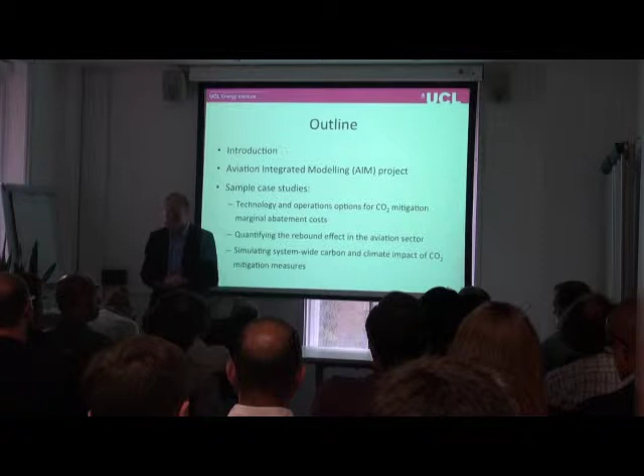The first one is going to look at the marginal abatement costs associated with different technology and operations options. And then we're going to have a look at how these cost changes may impact the system, how the system may respond to them by trying to quantify the rebound effect in the aviation sector. And then I'd like to bring this all together in a system study where we try and simulate the system-wide carbon and climate impacts of a number of different CO2 mitigation measures.

As I think we all know, aviation contributes significantly to the economy. The Air Transport Action Group estimated this year about 3.4% of global GDP. But of course, aviation also has negative environmental impacts and particularly climate impacts. An estimate is about 2 or 3% of global anthropogenic CO2 emissions are from aviation. But as you're probably all aware as well, CO2 is not the only problem when it comes to aviation. There's a number of other impacts.

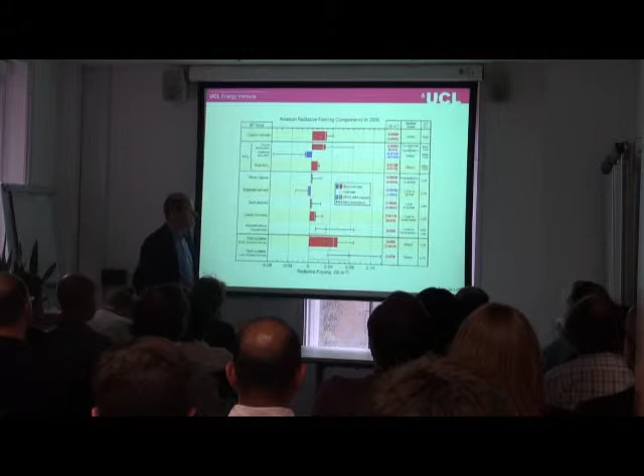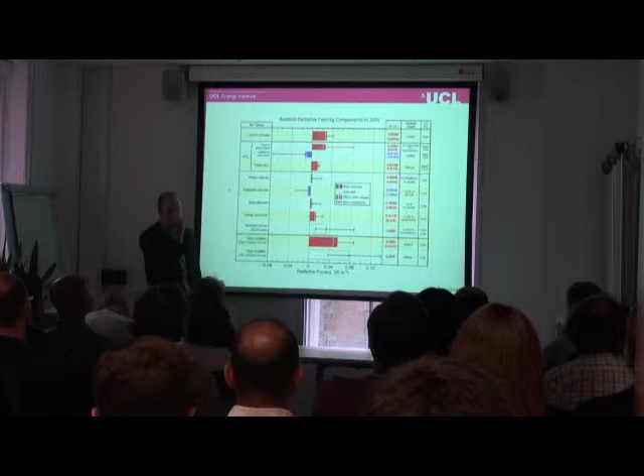I'm sure many of you will have seen this chart before from David Lee. At the top is the radiative forcing due to CO2. And as you can see, there's a number of different emissions that have different impacts. The net NOx impact is significant, and then the contrail impact is significant. Contrail-induced cirrus is also significant, but the uncertainties on that are still fairly large. But the result is that the radiative forcing due to aviation, including the non-CO2 effects, is significantly higher than just due to CO2. So there are non-CO2 effects, and these are important.

David Lee reports that about 3.5% to nearly 5% of global anthropogenic radiative forcing is due to aviation. That includes the non-CO2 effect. But this is 2 to 3%, 5% - these are not enormous numbers.

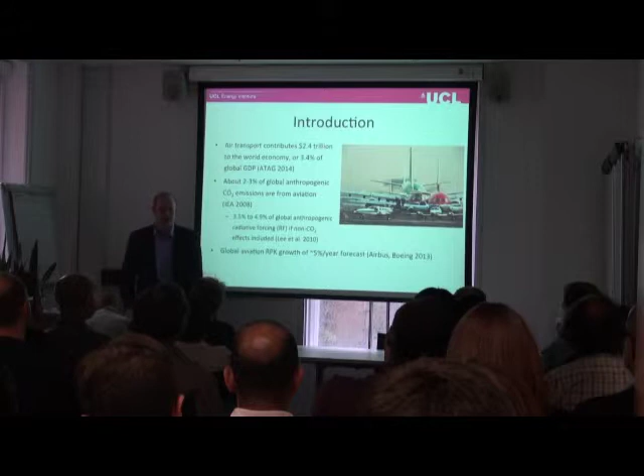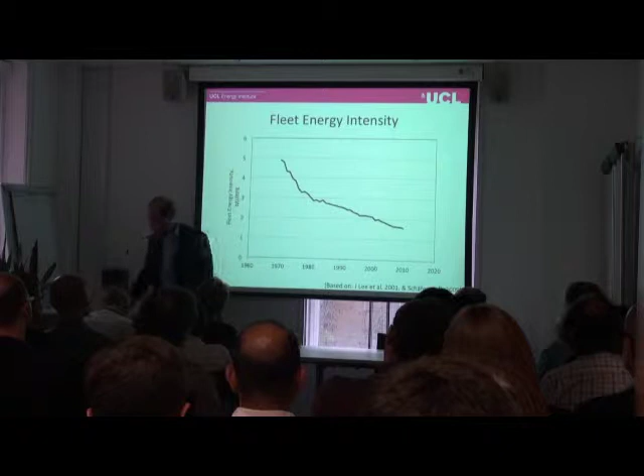This is why aviation is a target for emissions reduction policies, and the inclusion of aviation in the EU ETS is our obvious example.

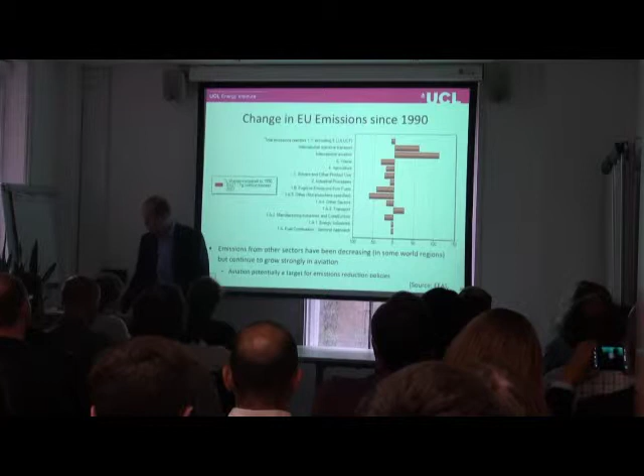So what kind of mitigation measures are there for aviation? We've already mentioned economic measures - inclusion of aviation in the EU ETS, for example, and the development of a global ETS or market-based measure to deal with aviation, currently being handled by ICAO. The idea is to increase costs to the airlines, and ultimately some of this will be passed on to passengers, reducing passenger demand slightly, or reducing the growth rate in passenger demand. But more importantly, it's stimulating other measures - that's really what we're after.

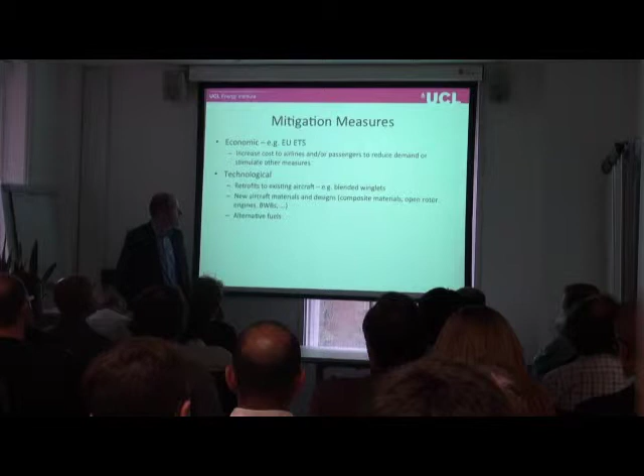A number of these measures are technological, varying from retrofits, fitting aircraft with blended winglets, new aircraft designs, new aircraft materials such as composites on the 787, more radical design changes such as open rotor engines - I'll show pictures of these later - and even more forward-looking design changes for the aircraft such as blended wing bodies. Alternative fuels is also a very important technological development.

There are also operational developments, particularly on the air traffic control side - continuous descent approaches and other procedures that reduce fuel burn operationally and improve the efficiency of the air traffic system. There are also changes airlines can make, such as altering their cruise speeds so they coincide more with fuel optimal speeds as opposed to cost optimal, and lightweighting and such like.

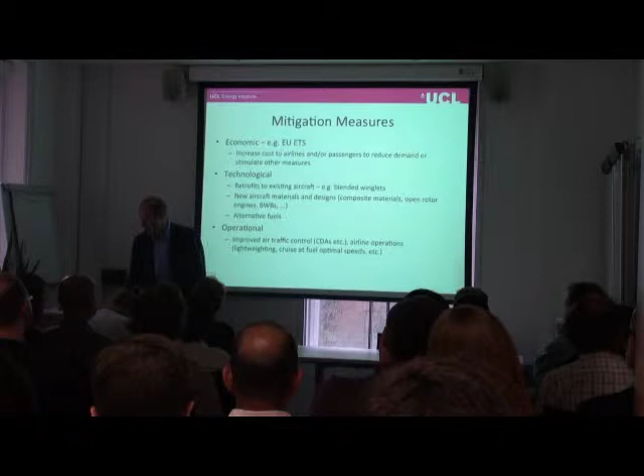There are a number of different measures, and the best results are likely to come from a combination of these - there's no real silver bullet, so to speak. The best solution is going to come from a number of these measures. This is where complications arise, because the measures can interact, and they're not necessarily additive. An obvious example is if you apply an engine upgrade kit and then re-engine the aircraft, you're not getting the additive benefit of both.

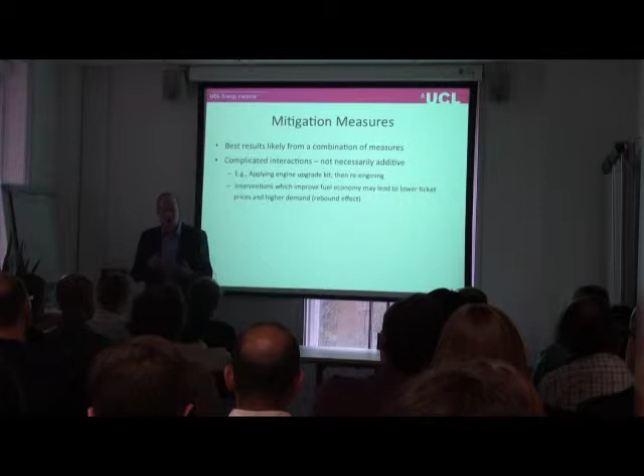There are also other effects, such as introduction of new technology causing changes in operating cost, which may play through the system to have other effects. For example, reductions in operating cost could lead to reductions in fares if in a competitive environment, which could ultimately lead to an increase in demand. So you're getting this rebound effect.

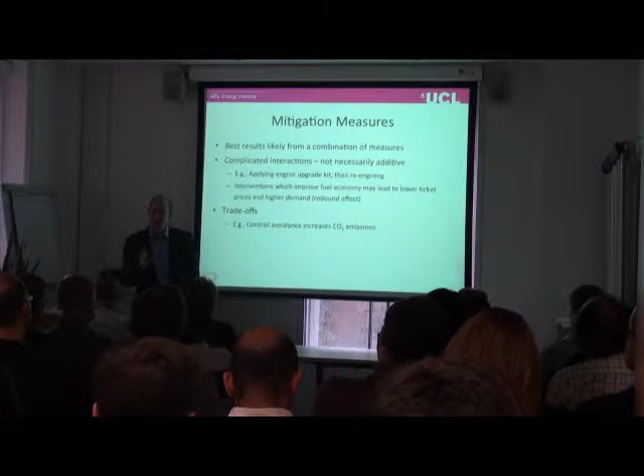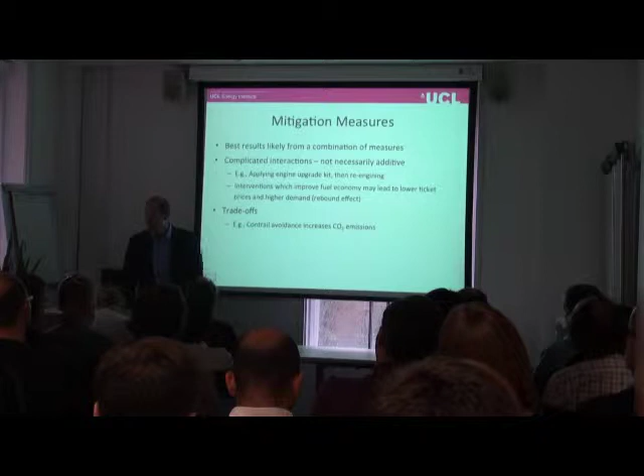There are also a number of trade-offs. An obvious example is contrail avoidance - if you introduce air traffic measures to route aircraft around regions of airspace with contrail formation, you're burning extra fuel in doing that, increasing CO2 emissions. So there's a trade-off in climate impact there. There are other trade-offs too, for example in combustor design in jet engines with NOx production and CO2.

Also importantly, we don't know what the future holds. There are a number of uncertainties regarding future populations, income growth, particularly oil price and carbon prices. These all have a significant impact on how different technologies would enter the fleet, at what rates, which technologies, and how they would compete with each other.

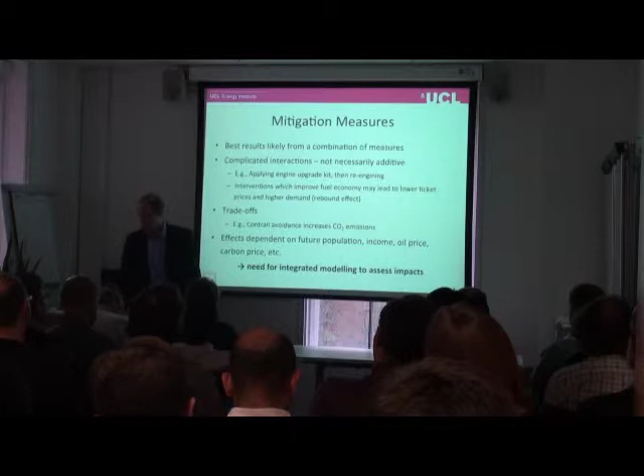This really suggests there is a need for integrated assessment modeling, and this was really why we started the Aviation Integrated Modelling project. This was started at Cambridge back in 2006, and the objective was to develop a policy assessment tool for studying the interaction between aviation, environment, and economics.

And we've used this model to do a number of global studies, a number of regional studies, looking at various different timescales. I'm not going to describe each module in detail, but I'd like to talk you through how the model works.

This outputs to an airline and airport activity module, which models how the airline chooses to serve that demand - scheduling, what type of aircraft they're going to operate, what kind of flight frequencies. It also estimates flight delays in the airport vicinity.

This takes significantly from the aircraft movement and aircraft technology and cost module, because in the aircraft technology and cost model we introduce new technology, and we also model fleet turnover - how existing technology is being retired, and how new technology is entering the fleet, at what rate. This is of course a function of fuel price and a number of other things.

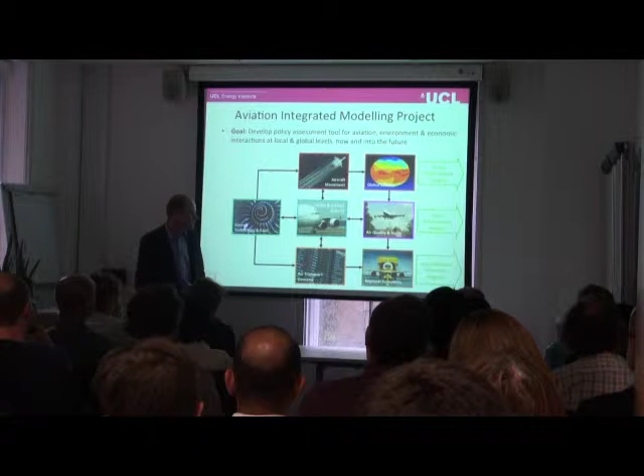For regional economics, we then estimate environmental costs, particularly associated with air quality and noise, and economic benefits coming particularly from the demand flows that we're estimating, and we can compare these - economic benefits.

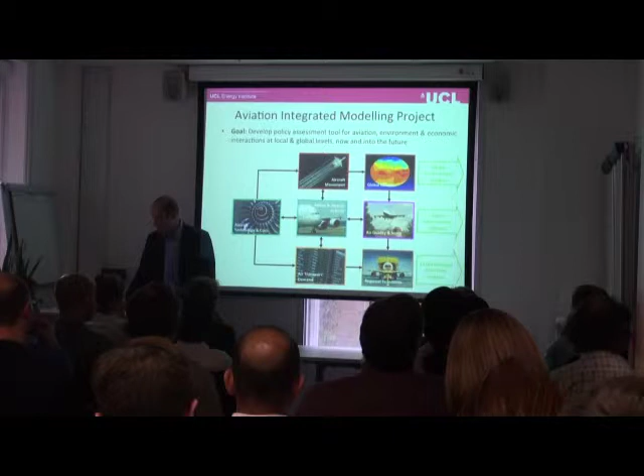Now, we can then apply policy levers to each of the modules on the left - whether it's evolution of the air traffic system, or changes in airport capacity, such as adding a runway at a key airport or not. Regulation, so forcing certain technology to come into the fleet. Economic instruments, an ETS or passenger duty. And then we can model how these effects play through the rest of the system before outputting to the impact modules.

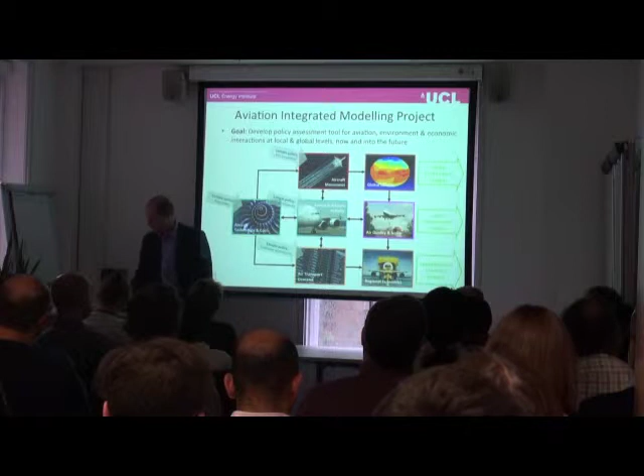The scope of the model is 95% of the global scheduled revenue passenger kilometers, as shown there. As I said, I'm not going to go into detail on each one of the different modules - there's quite a lot of detail in how we do the modeling in each module, and you're welcome to talk to me afterwards about anything you're interested in.

I'd particularly like to talk about the modeling of airline decision making, which falls particularly in the airline and airport activity module, and a little bit in the aircraft technology and cost module. The first task is to predict flight network routing and scheduling, and we have two levels of modeling for this. At the global level, we typically use a fairly simple model that assumes the flight network routing structure stays the same.

Now this is a reasonable assumption for developed regions, but for some of the developing economies, India, China, South America, this is less good an assumption. We assume also fixed load factors, and then we use a multinomial logit model to predict how the use of different aircraft size categories changes with time as demand grows.

For more regional studies, we have a high fidelity model that actually simulates the airline decision-making process. What we do here is maximize profit for each airline and optimize the choice of aircraft and the network, so we do a network optimization.

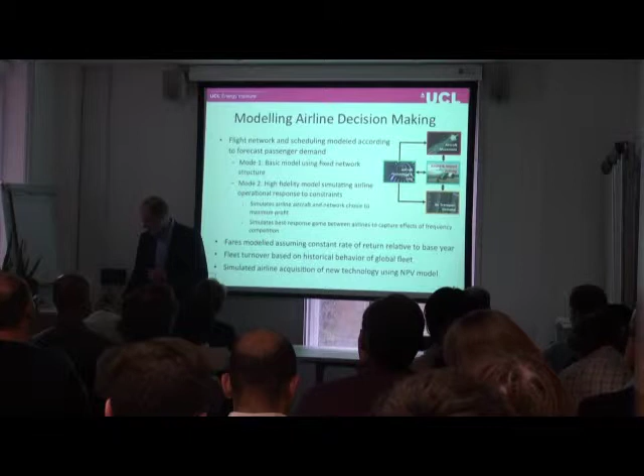So what I'd like to do for the rest of the talk is address the question I posed at the start: is technology enough to mitigate the climate impacts of aviation? I'm going to do that with three different case studies.

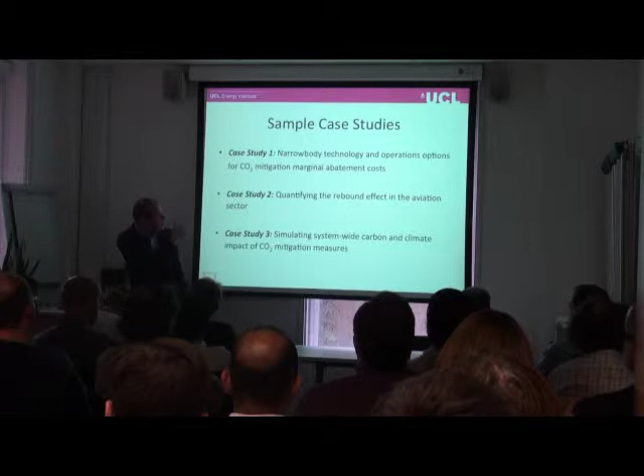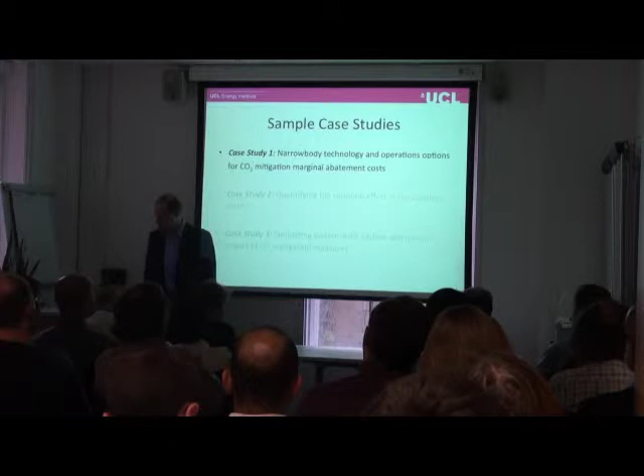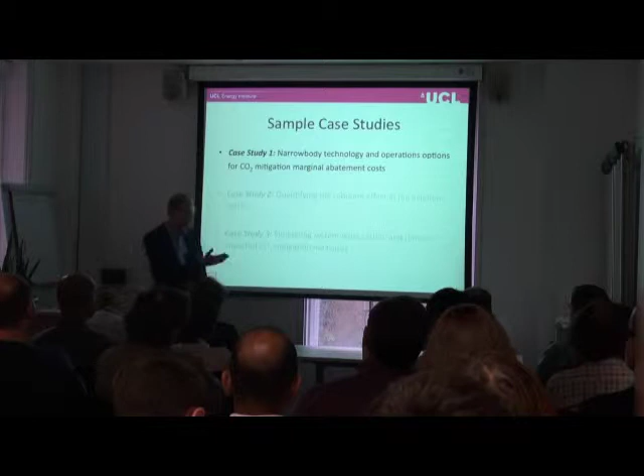I'm going to start off by looking at trying to quantify the marginal abatement costs for narrow-body aircraft, particularly looking at technology and operational options to do this. This study specifically looks at the US domestic narrow-body market, and Andreas Schaefer and I have worked for a while on this, but he took the lead, so I acknowledge that.

Now, what do we mean by marginal abatement cost? It's typically defined as the change in your direct operating cost divided by the change in the CO2 emissions mitigated. So units are dollars per ton of CO2.

But there are some problems with this metric because it's a snapshot in time. At a certain level of fleet entry for a certain technology and certain fleet characteristics, it's really just a snapshot in time. So it becomes difficult to compare different technologies that may be entering the fleet at different times, and therefore entering with a different fleet structure. Different measures enter at different times, and it's very dependent on the structure of the fleet - how many aircraft are close to retirement, what size category are they, does this correspond to the technology we're introducing. It also doesn't account for the buildup of CO2.

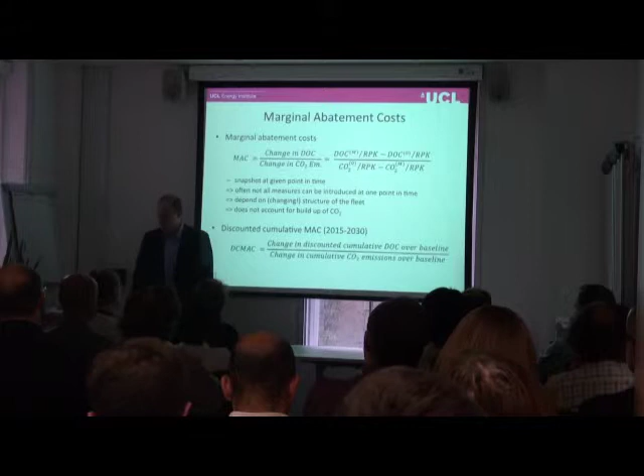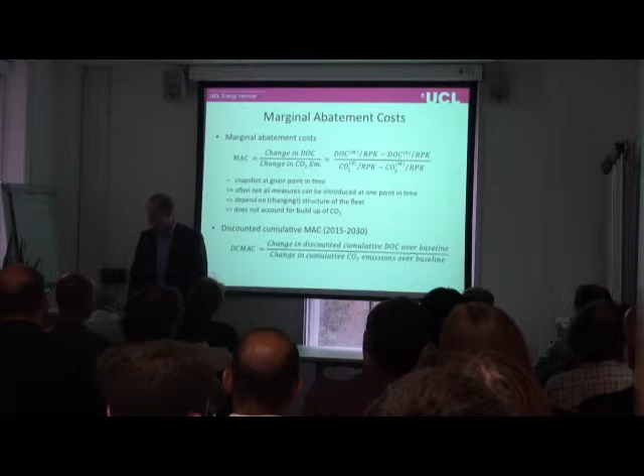So what we do in this study is use a discounted cumulative marginal abatement cost. Over the period 2015 to 2030, we calculate the change in discounted cumulative cost relative to a baseline which doesn't include that technology, and then divide that by the change in cumulative CO2 emissions, again relative to a baseline. This allows us to compare technologies to each other for that period, taking into account changes in fleet structure and that different technologies may only come into the fleet in limited ways, as well as how quickly the technology will come into the fleet.

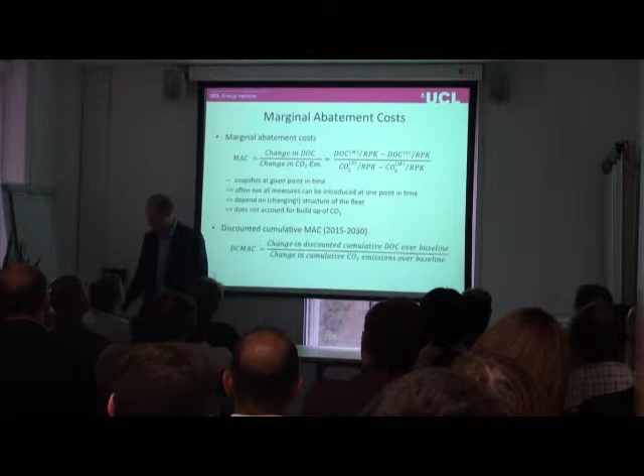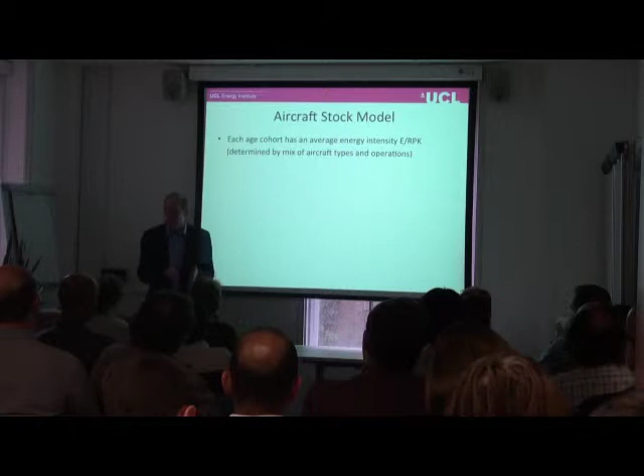Speaking of aircraft stock modeling - in the fleet structure, there are different cohorts of aircraft with different fleet ages, and the energy intensity for each age cohort is going to be different. It's a function of what aircraft type are of that age and what type of operations they're being used on. As you modify each age cohort with retrofits, for example, or retirement, this impacts the total fleet energy intensity.

So it's important to capture the fleet structure and how these different cohorts can be targeted. For example, if you've got a retrofit, you're probably not going to want to target aircraft that are just about to be retired. And if you don't account for the fleet age, you're not going to be able to account for that effect.

Now, importantly, these effects propagate over time, and this allows us to align the retrofits with the maintenance schedule. Certain retrofits are significant and require C checks to make the change. They can't just be done on the line, so this allows us to take that into account as well.

There's a number of uncertainties here, though. Firstly, simply the fuel savings potential of the technology. There's a lot of technologies that we're still quite uncertain what potential they will have. Even more so, what's it going to cost? Operational cost as well as capital cost. This is highly uncertain.

Also, associated with the cost, there's a number of costs that can often be ignored. For example, if you consider increasing your load factor, one cost to the airline is that passenger reaccommodation costs go up. Because if that flight gets cancelled, flights behind it have higher load factors, so there's fewer seats on which to accommodate those cancelled passengers. So you really need to be careful about capturing as many costs as possible, and this is particularly challenging.

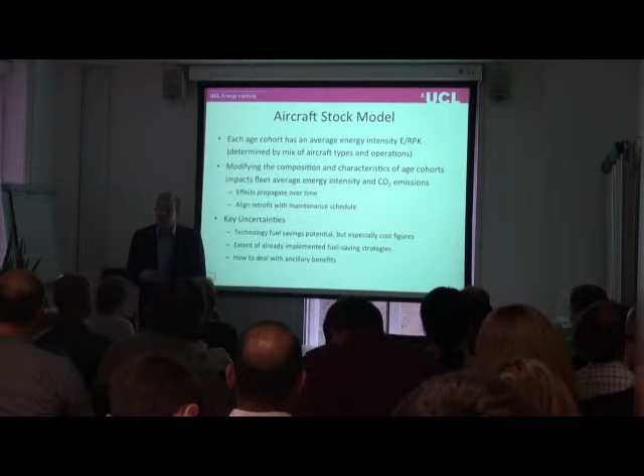It's also not always clear the extent to which some of these fuel savings technologies have already been adopted. So for some of the near-term ones, how much are they used already? And then also, how do you deal with ancillary benefits? A number of these technologies have benefits besides just reducing fuel burn, so how do you account for these?

Okay, so let me just go through a number of the technologies. On the aircraft technology side, you've got a number of retrofits, things like carbon brakes, electric taxiing, blended winglets, new lighter seats, which can give significant weight reductions, to slightly larger changes such as new engines, Pratt & Whitney's geared turbofan, or even more revolutionary open rotor engines.

On the aircraft side, you've got new aircraft designs coming in, so more evolutionary designs such as the A320neo and the 737 MAX, and more revolutionary designs such as an aircraft that's optimized for use with open rotors, optimized to fly slightly slower with higher aspect ratio wings, etc.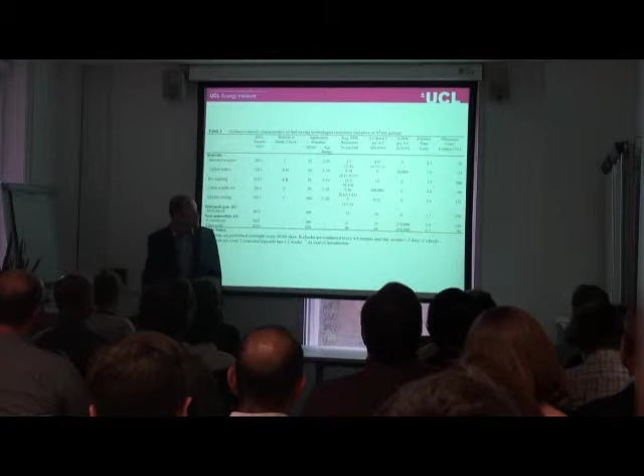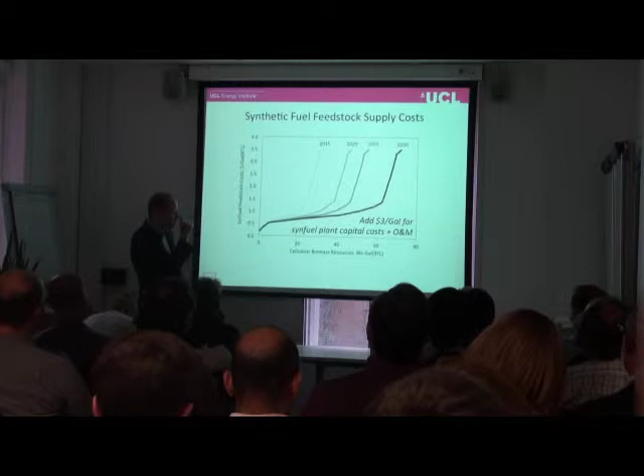We also model synthetic biofuels or synthetic fuels. We're particularly interested in cellulosic biomass. One of the key assumptions here is what is your feedstock cost? So we use a chart like this, where we basically assume that initially the feedstock cost is relatively low because you can use easily available feedstocks such as industrial waste, waste from the logging industry and such like. But very quickly those costs are going to go up because you use up those easily available feedstocks. Over time, though, the expectation is that these costs will come down.

Now, I want to stress that this is not the fuel cost. You usually add $3 per gallon for the processing cost on top of that. Interestingly, if you look at the current US domestic narrow-body jet fuel demand, it's actually still pretty low, so you can actually supply the US domestic fleet with synthetic biomass. But obviously that will cease to be the case very quickly because of growth.

Operational options: again we model a number of different procedures, so single engine taxiing, optimized departure procedures, optimized approach procedures such as continuous descent approaches or dynamic descent approaches. Also improvements in the en route portion of the flight, improving your lateral inefficiencies with the introduction of ADS-B technology, for example, as well as improving your vertical profile and speed profile, which can all reduce your fuel burn for operations.

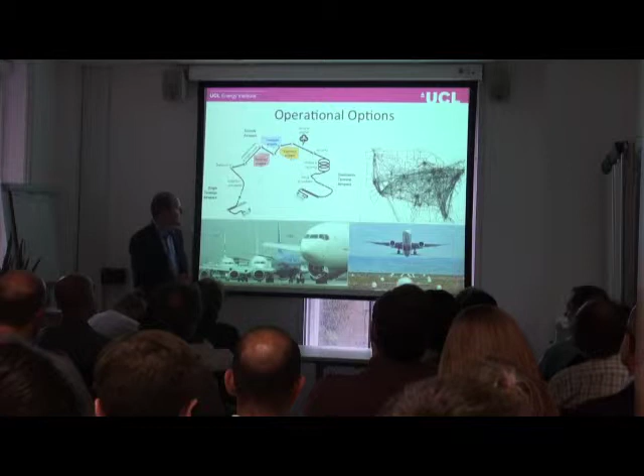And again, we make a number of assumptions about the costs of these technologies and the potential, and I'm not going to show you the chart, but if you're interested, I can send it.

Finally, we look at a number of different airline business strategies that could mitigate CO2 impact. One is reduced fuel tankering. A lot of airlines tanker fuel because of cost differentials.

Other strategies include parking the aircraft early, so early retirement, and better matching of aircraft type to mission. This is where you've got a flight with a relatively low load factor, and you could operate that more efficiently with a smaller type, such as a regional jet. Also increasing load factors generally, engine washing, and surface polishing as well. Obviously they don't actually use Pledge to polish aircraft.

For a number of these measures, the costs are quite difficult to quantify. For example, with better matching of aircraft type to mission, a key cost is that by doing that you're increasing your load factor, so your passenger reaccommodation costs have gone up significantly. Before, you had flights that were half full, so plenty of space to reaccommodate passengers. Now you've got flights that are almost full, with no space to reaccommodate passengers.

But there are also costs associated with fleet commonality. A number of airlines operate one aircraft type because the maintenance costs and training costs for their crews are reduced, and it gives them a lot more flexibility. As soon as you say, well, we now want you to fly regional jets as well, those costs go up, and they can be quite difficult to quantify.

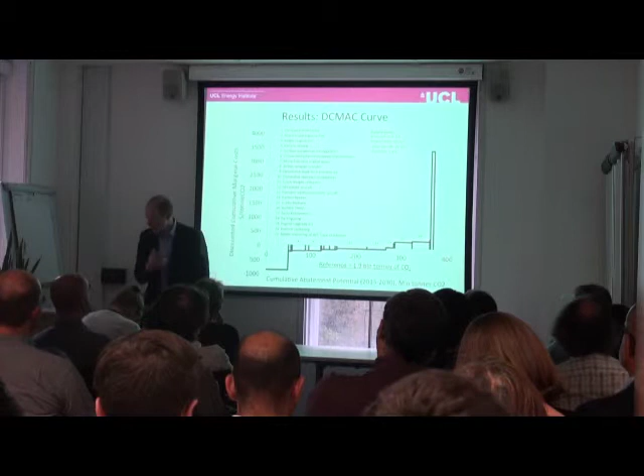So what's the result? This is a marginal abatement cost curve. On the x-axis is the cumulative abatement potential, and on the y-axis is the discounted cumulative marginal cost. Everything underneath the graph are measures you would expect airlines or manufacturers to be pursuing, because they're cost effective at the existing oil or fuel price. Measures above the graph would need an increase in the fuel price to be cost effective, either simply the fuel price rising or something like emissions trading causing the effective fuel price to rise.

Now, these marginal abatement cost curves have been done before, and there are a couple at least for aviation. Typically they only plot marginal abatement costs, not the cumulative abatement potential, so cumulative cost, which is one change here. But also, this work is well validated by the fact that all the technologies underneath are indeed technologies we know airlines or manufacturers are starting to pursue. So that's a good validation, and we've tried particularly hard to be rigorous about the costs. I think this is a significant improvement on some of the costs generated in the past, but as I said, it is a challenging cost.

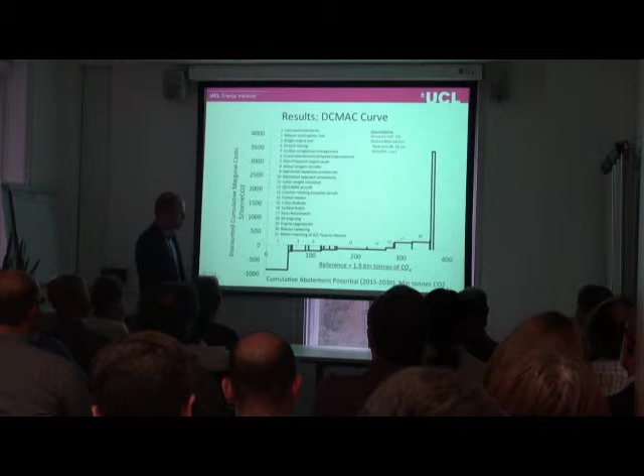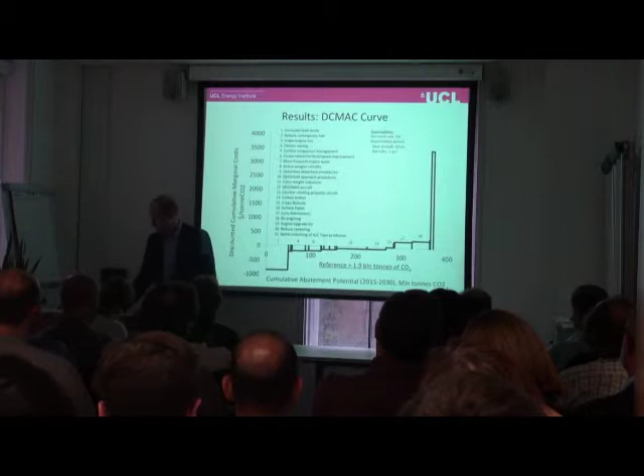We're getting about 400 million tons of CO2 mitigated, not quite, with all the measures. This compares to the reference over this period of 2 billion tons of CO2 that we've estimated, so that's about 20%, a sizable contribution. If you plot that on the curve I showed before with fleet energy intensity, the top line shows what you'd get if you simply did fleet turnover with existing technology, and the lower one shows that with a combination of all these measures, you do get a sizable reduction. So you're able to continue pulling that chart down, which is very positive.

However, there's a key uncertainty, and that is the growth rate. What kind of growth rate are we expecting in the narrow body fleet? Any growth rate higher than 2.5% to 3% per year means you're no longer getting carbon neutral growth, so that 2030 emissions would equal 2010 emissions at about 2.8% growth, taking into account all the measures described. Any growth rate higher than that, you're not getting carbon neutral growth; anything below, you are getting carbon neutral growth and better. If you only take the measures that are cost effective at the current fuel price, the cutoff is about 1.5%, so any growth rate above that, and you're not getting carbon neutral growth. That's one of the key uncertainties.

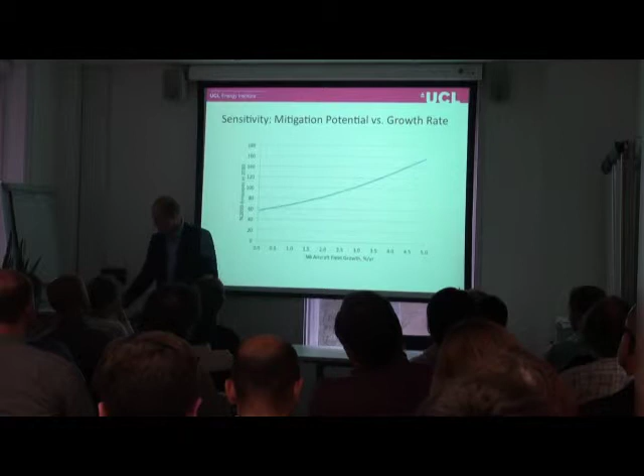To summarize the conclusion of this specific case study, we identified a number of mitigation options, and a lot of them appear to be cost effective at current fuel prices and are indeed being pursued by industry, which validates the results quite well. Obviously, if you see a technology that is highly cost effective on your marginal abatement cost curve, but airlines aren't pursuing it, then you realize you're missing some kind of costs.

As I said, the mitigation potential is strongly dependent on the fleet growth. This has a big impact. There's also a number of other uncertainties, particularly with what the costs are, the capital costs and such like. So there are a lot of uncertainties, and some of the results can be quite sensitive to those, but not all.

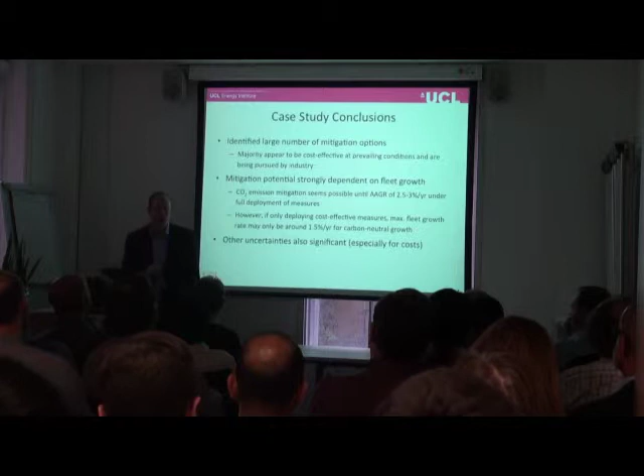Okay, so that suggests that there is mitigation potential. The question is then, how is the system likely to respond to that? And to start answering that question, I'd like to do a second case study, which is to quantify the rebound effect.

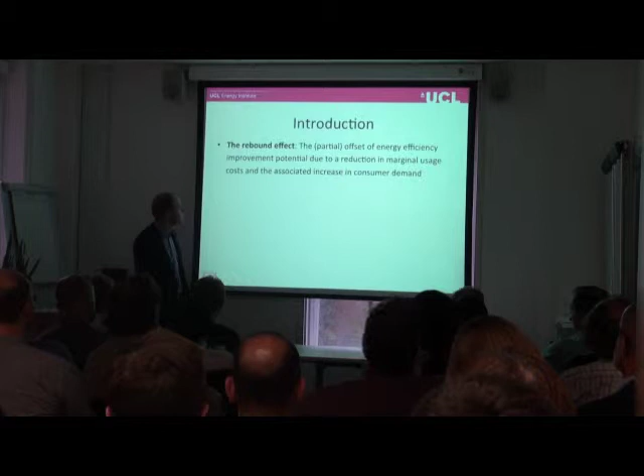Okay, so first of all, what do I mean by the rebound effect, just to clarify that? Define it as the partial offset of energy efficiency improvement potential due to a reduction in the marginal usage costs, and that's typically associated with consumer demand. So you've got a new technology that's reduced your fuel burn, you're reducing your operating costs in a competitive environment that's reducing your fares, so your demand is going up.

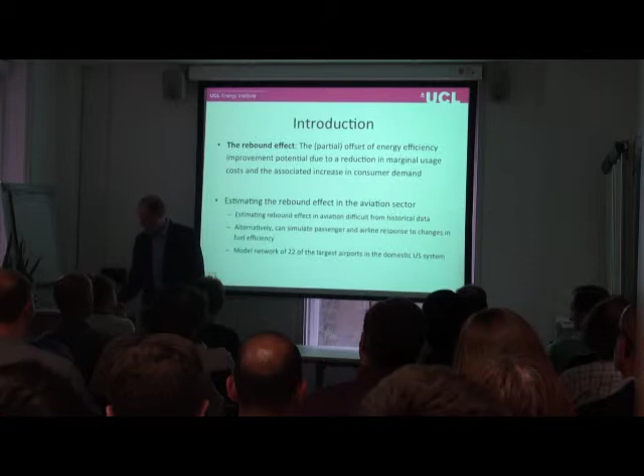Now, for the aviation sector, it's quite difficult to estimate this from historical data, simply because the improvements in fuel burn have been pretty incremental over time, and the entry of technology into the fleet is very slow. Aircraft stay around for 30 years, so it's very difficult to see these changes in fuel burn and pull out the rebound effect from historical data.

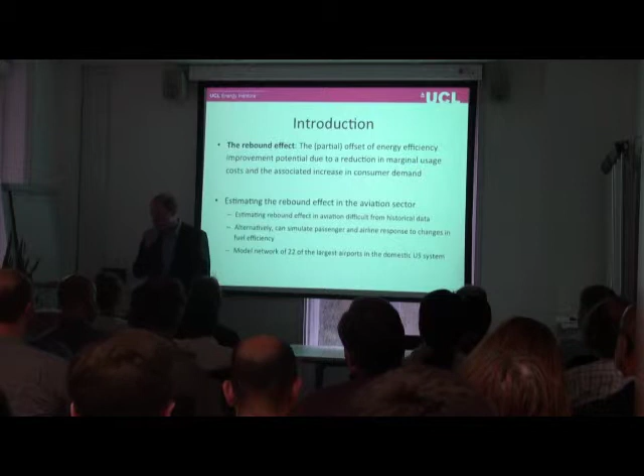But we have models that can simulate these effects. Particularly I was talking about the regional model that we use to simulate the airline response to different constraints. So we can use that to try and quantify how the system would respond to changes in cost. We do this—the study I'm going to show you now is for a network of 22 airports, so it's a relatively short, small network, but it's the 22 dominant airports in the US.

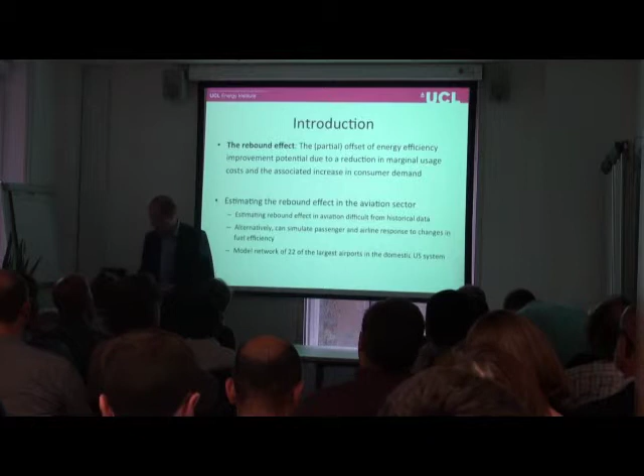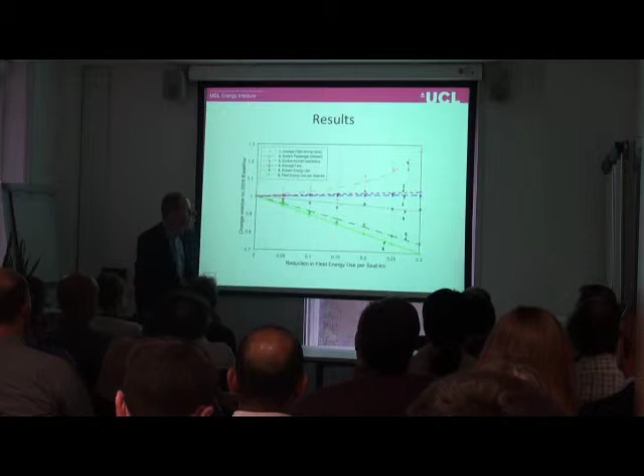The result is that we estimate a rebound effect of about 18%, and this includes the demand effect as well as the frequency competition effect, and also these mitigating effects of the delays, and also there's also a slight increase in aircraft size that you see as a result of this as well.

This result is obviously specific to the network that we modeled, US domestic network on the busiest routes, so it may differ. And I should stress that the majority of that 18% is the demand rebound. That's most of it. The other effects are relatively small.

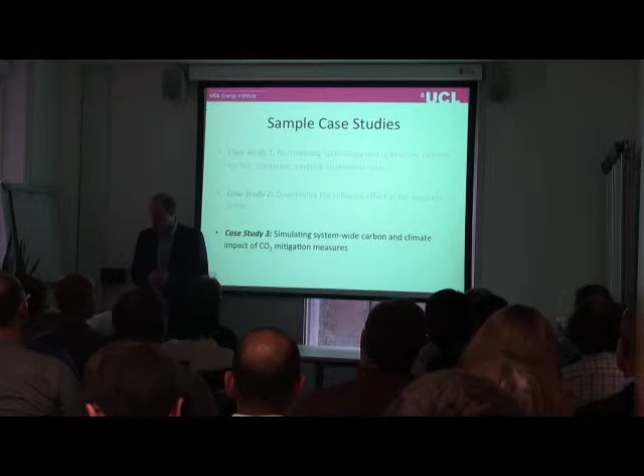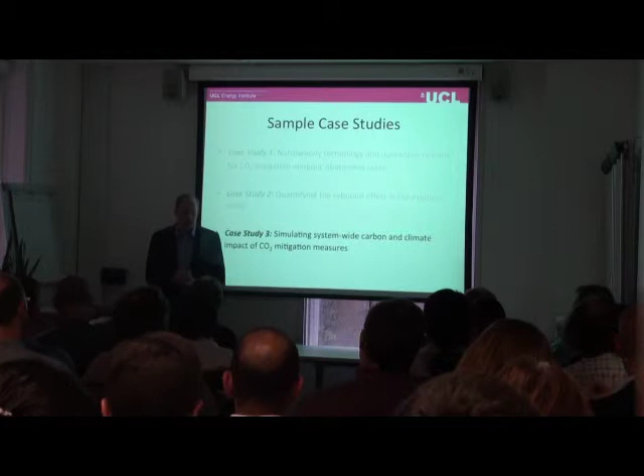Okay, so we talked about different mitigation options. It's clear that changing your operating costs does have a system effect, and so there is a response from the system. So what I'd like to do now is use a case study to bring this all together. So what we're going to do is simulate the system-wide carbon and climate impacts of different CO2 mitigation measures. This is a global study that was done by Philip Krammer a couple of years ago.

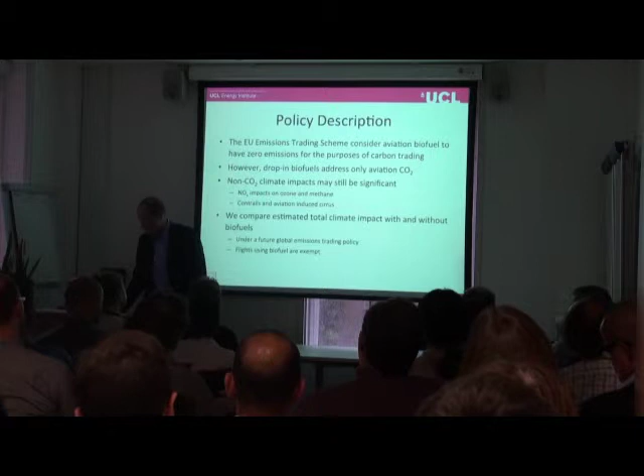The climate metric we use for this study is absolute pulsed global warming potential. The radiative forcing I showed you at the start, on its own, does not account for the different timescales of the different emissions. So we use absolute pulsed global warming potential: we assume a pulse of one year, then look 100 years into the future and calculate the global warming potential for that period.

We model non-CO2 effects. We specifically look at NOx impacts on ozone and methane, calculated by altitude and flight level, and we also calculate the impact of contrails and contrail-induced cirrus. We neglect the other non-CO2 impacts. We also assume that atmospheric background concentrations don't change with time, which is of course a simplifying assumption.

Now, the technology assumptions we apply in this study - unfortunately this study was done before the marginal abatement cost curve I described earlier, so we don't include quite as many technologies as we had in there. We're in the process of running AIM with those technologies.

In this study we had a drop-in biofuel, also cellulosic biomass feedstock based. The assumption was that it was available from 2020, and that we could go up to a 50-50 blend, which is very high, but this study is looking up to 2050. Biofuel production was initially limited, so we're not assuming that in 2020 you can get your 50-50 biofuel blend - we do limit production.

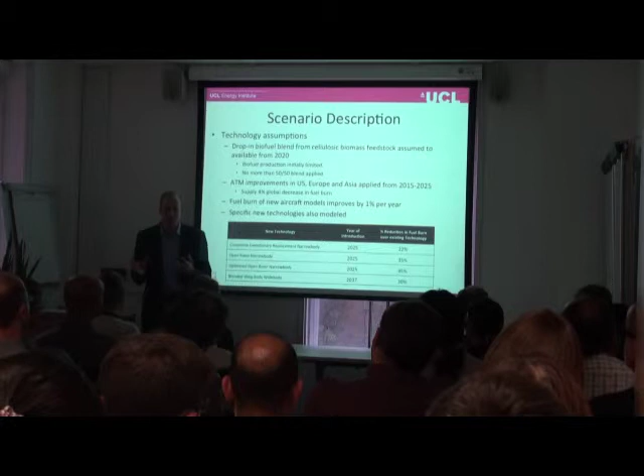The AIM model can simulate how these different technologies enter the fleet and how they compete with each other, because you may have two technologies - one with lower fuel burn but higher purchase cost, higher capital costs - and depending on the fuel price, the uptake of those two technologies may differ. So there can actually be competition between technologies, and we capture that within AIM based on the fuel prices we model.

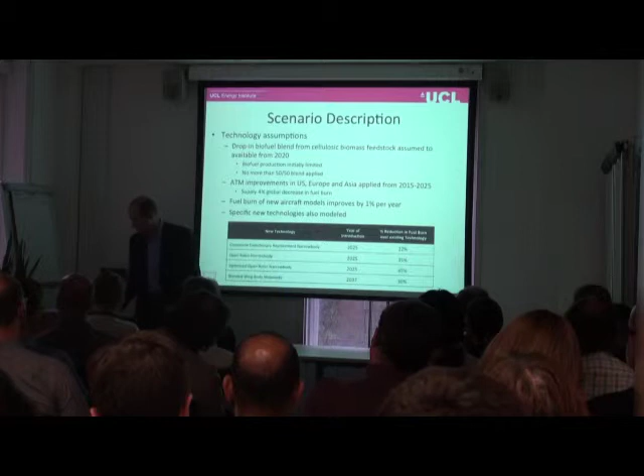Speaking of fuel price, we have to make assumptions about socioeconomic scenarios, describing population growth, income growth, oil price, etc. We use three different scenarios from exogenous models: the MIT IGSM model, the Stanford Merge model, and the Joint Global Change Research Institute's Minicam model. This represents approximately high, medium, and low global demand growth.

We then also consider emissions trading. We apply a global emissions trading scheme to aviation here, and we make the assumption that it's an open scheme, which means we can reasonably assume aviation will be a net buyer. So we simply apply the carbon prices as a carbon tax.

The levels for the carbon tax we take from these three models - in those models they set the carbon price in order to achieve long-term atmospheric CO2 concentrations of either 550 parts per million or 450 parts per million. The advantage of this is that the carbon price is internally consistent with the oil price, the income forecast, and the population forecast, and this is valuable. And then, of course, we assume that biofuels are exempt.

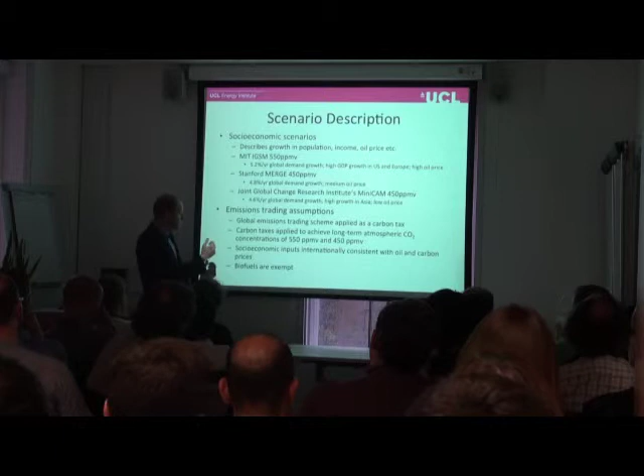So how does this affect the life cycle CO2 emissions? This shows the three different scenarios, and you can see there's significant growth in the baseline, which is no emissions trading or biofuel. There is some technology uptake in that baseline, but not a huge amount.

We then introduce emissions trading, the second line in the three cases, and you can see there's a slight drop, because with emissions trading there's an increase in technology uptake, with the exception of biofuel, which we introduce separately. Because we're modeling up to a 50-50 blend, the impact of biofuel is quite significant. In all three scenarios you get these periods of carbon neutral growth.

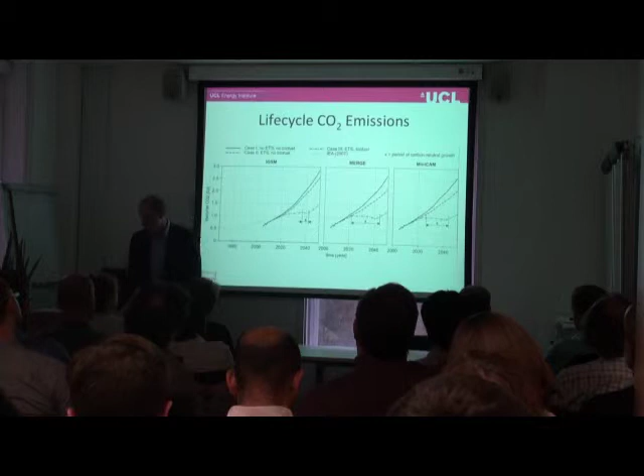So first of all, this suggests that you could get carbon neutral growth with an emissions trading scheme and with biofuel. But is this climate neutral growth?

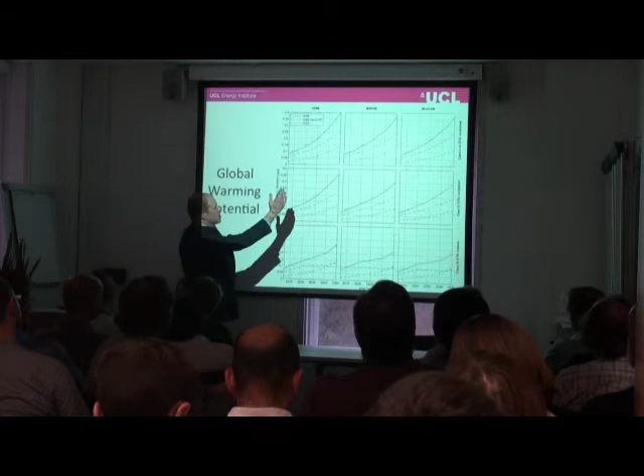This is a similar plot for global warming potential. Again, the three represent the three different models. The top three charts represent the first case, no emissions trading and no biofuel. The second represents just emissions trading, and you can see there's a slight drop in the total global warming potential. The third case is with the biofuel.

The most important bit here is that it's still always increasing. Yes, it's a significant decline on what you had even with emissions trading, but it's not climate neutral.

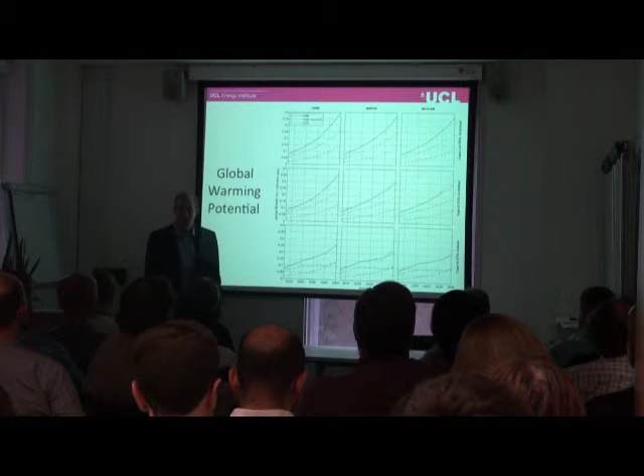So the conclusions from this study are: with a 50-50 biofuel blend and emissions trading, your 2050 emissions could reduce by about 50%, and this is due to both a demand reduction in the demand for flying, biofuel uptake, as well as the uptake of these different technologies.

And it suggests that carbon neutral growth is indeed possible, although there are questions about whether it's sustainable in the long term. But of course we only included a certain number of technologies. New technologies will come up as we progress, so it may be more sustainable than that graph showed, at least.

And then the reduction in climate impact is somewhat lower, only about 30%, as opposed to the 50% for the CO2. This is looking at a 100-year time horizon.

If you reduce the time horizon to say 20 years, the impact of the CO2 is less significant, and the impact of the non-CO2 effects becomes a larger proportion. You end up with only about a 15% reduction.

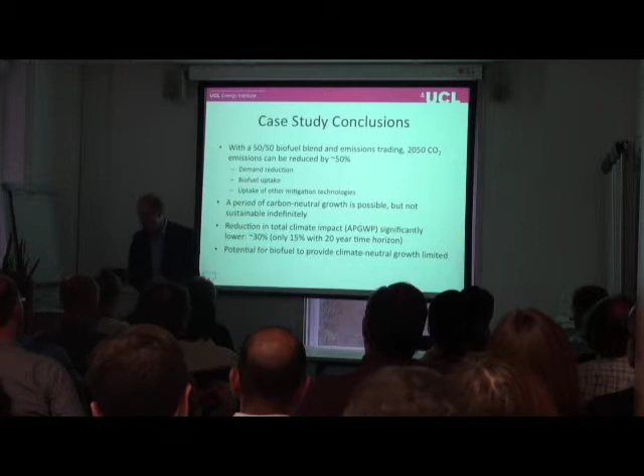So there is potential for biofuel to prevent carbon neutral growth... I should say, potential for biofuel to provide climate neutral growth is limited. I should read my slides. It's challenging. Carbon neutral growth does seem to be possible, but climate neutral growth is more challenging because the biofuel doesn't really give you any benefit on the non-CO2 effects.

And this questions whether some of the emissions trading exemptions for biofuel are justified. Obviously I think you should still have exemptions, but whether it should be completely exempt or not is a different question.

Okay, so that brings me to the conclusion: is technology enough? And of course the answer is, it depends.

CO2 emission mitigation is highly dependent on fleet growth rates, as I showed. It's also highly dependent on technology adoption. Technology adoption is very dependent on the purchase price of the technology, the fuel price, competing technologies, as well as your accounting assumptions.

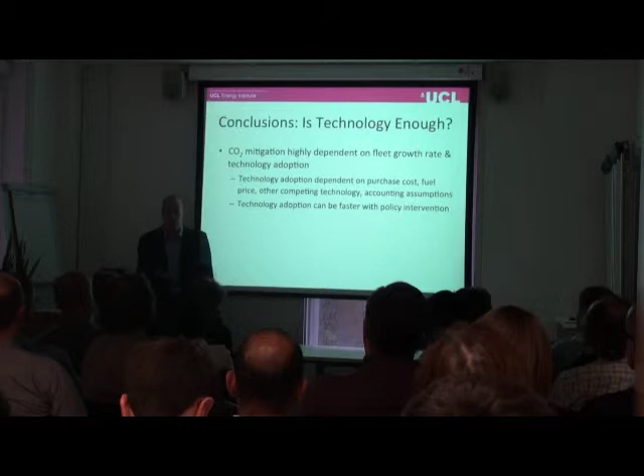Higher fuel prices would mean greater uptake of technology, which would go further to mitigating carbon. Technology adoption can also be sped up with policy intervention. Introducing an emissions trading scheme is essentially increasing the fuel price, so more technology will be adopted, and will be adopted at a faster rate.

Carbon neutral growth may be possible, but only under significantly higher fuel prices. And this is important: whether those high fuel prices come simply from the price of oil going up, or from an emissions trading scheme that applies a reasonably high carbon price, carbon neutral growth is only really possible under a scenario with higher fuel prices. The prices have to be sufficiently higher to allow the adoption of all these technologies.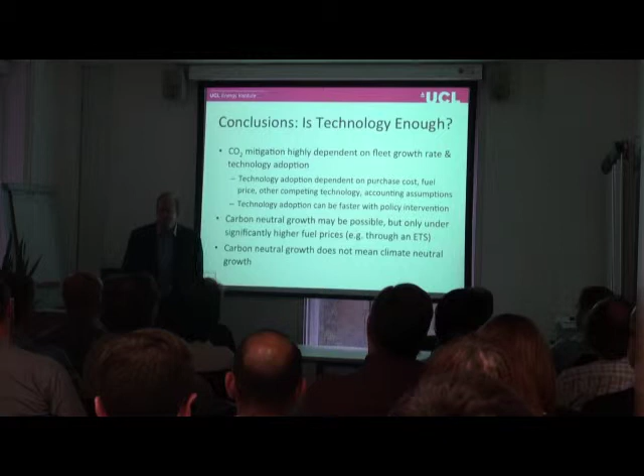Carbon neutral growth, however, does not mean climate neutral growth, and that is more difficult. Okay, thank you very much.

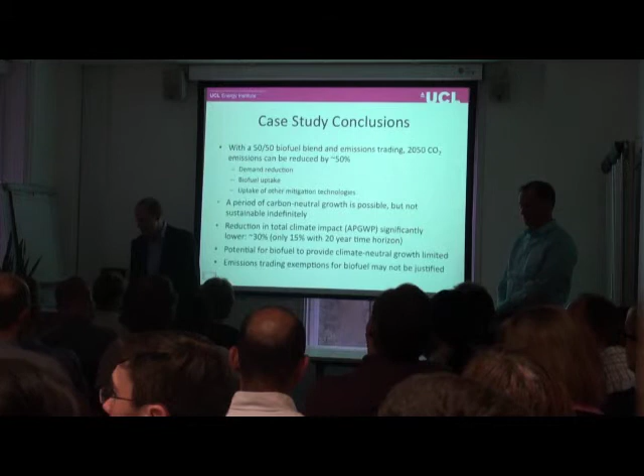Question number two was, I was wondering if you've done any work looking at what would happen if an appropriate level of ETS carbon price was applied to biofuels, how that would impact their uptake and the climate impact reduction. Within Europe specifically, or globally? I'm interested in both.

Let me go back to the cost curve. So the main assumption on the cost, correct me if I'm wrong Andreas, is based on this curve, and a lot of it is based on what feedstock we're using. For cellulosic biomass, there is quite a lot of waste material that, at least in the near term, is cheap, and there's enough of it at the moment to actually fuel the narrow-body fleet in the US. So there's a lot of waste material, but that's not going to be growing at the same rate that aviation is, so very quickly you'll use up those costs, and your other costs are going to climb.

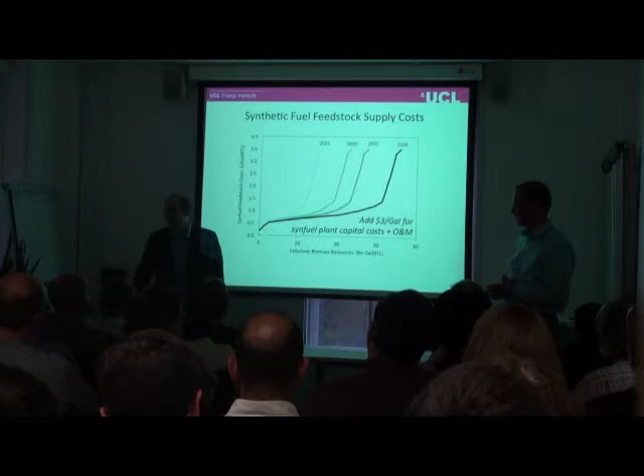Do you have anything to add? It is certainly very much region specific, I don't know what part of the world you were looking at. These are costs for the US, taken from the Oak Ridge billion-ton study. As Tony explained, there is a lot of stuff around that is very low cost, which is residuals from agriculture and industry, but eventually, if you want to supply more than the aviation sector, your costs go up. The spreadsheet model allows you to enter a whole range of assumptions and shows you how the cost curve may shift, to the left or to a higher level, depending on the assumption. This was one of the objectives in doing this marginal abatement cost curve, to make it open to other assumptions, because there are a huge amount of assumptions you have to make in this kind of study. So we could plug in higher feedstock costs or processing costs, for example. But I think it varies a lot by region. Specifically, cellulosic biomass in the US has initially reasonably low feedstock costs, but that may not apply, or does not apply, to other feedstocks.

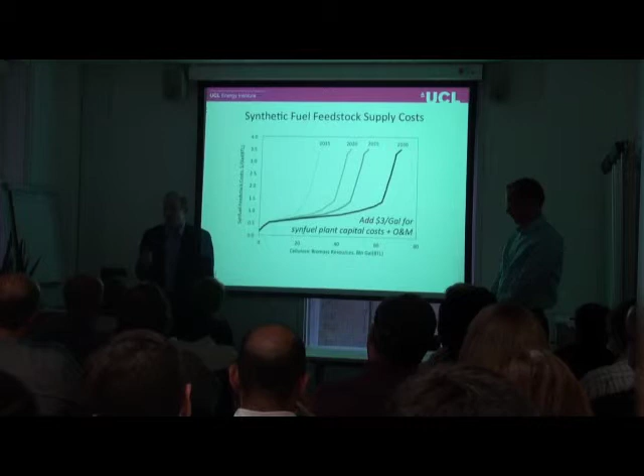Your second question was about? Yeah, I was wondering what the feedback impacts would be if biofuels had a smaller carbon price attached to them. The cost to the airline is higher because they're paying a higher price for their fuel. So if the reduction in cost is less, some of the feedback effects would give you slightly less rebound, which would help your CO2, but it's also going to increase costs to the airline. It's increasing your effective fuel price, so it could actually induce other technologies. This is at $3 per gallon; if your fuel price was higher, then more of these technologies would be adopted. So by charging a bit of carbon tax for your biofuel, you'd be increasing the effective price, and more technologies may be adopted. Okay, thank you.

Yes, a question about the limitation at the end, the 50% reduction. Presumably that doesn't include any growth in demand? So that's a 50% reduction relative to the 2050 baseline equivalent. Let me go back to the chart. So baseline equivalent would include demand, right? Yes, it's not saying a 50% reduction relative to 2010.

So, it's that chart there - this is 50% of that. So what we're saying is that introduction of biofuel and the ETS could reduce your 2050 emissions by 50%, but that definitely doesn't mean you're getting carbon neutral growth relative.

The other question I had - you've got carbon neutral growth for a short period, but what about the period after? Well, that's exactly it. I should stress that we model a certain number of technologies, and in 2030 there will be other technologies we haven't thought about. But it's a very real concern that, yes, we could get carbon neutral growth initially, but maybe it's not sustainable long term, because demand for aviation is expected to continue to grow. Particularly for this one, it's actually a relatively small period of carbon neutral growth before you get this increase. This is a 50-50 biofuel blend, so that's a lot of biofuel.

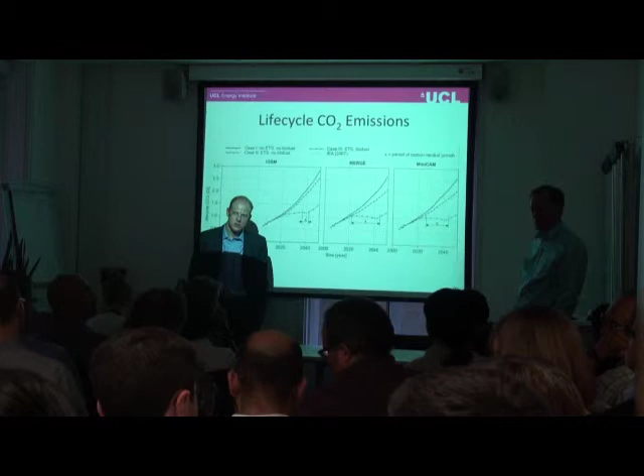It strikes me that you can do exactly the same for the committed orders from Boeing and Airbus, etc. at the moment, and you can actually build that into the model, and you can assume the Chinese fleet is going to rise dramatically. You can build that in and get a very good idea what future cumulative emissions are going to look like.

Definitely, and that doesn't give you that long, unfortunately, because from orders to actual delivery it varies significantly. For something like a 787, the first orders were a number of years before delivery, but for some types already in existence, the time period is a little bit shorter. But certainly that could give us a picture to 2020, or probably not quite that far - well, probably 2020, maybe even a little bit further than 2020. The orders would give us that picture, certainly.

Obviously, airlines do sometimes cancel orders, and sometimes, under extreme circumstances, they will even park aircraft. But with our assumptions, we're not taking that into account - but that's a good point. You will also withdraw aircraft from the fleet, and we don't know the rate of withdrawal, which is important. That's a good point. Fleet retirement rates we can get from historical data, and they actually seem to be relatively insensitive to oil price, so you can get some idea of what the fleet retirement rate is as well. But that's an interesting point.

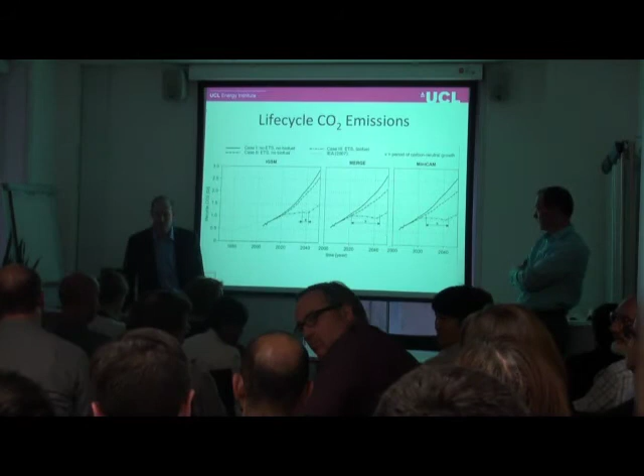Thank you. Owen Bellamy from the Committee on Climate Change. I was quite surprised to see the abatement costs were negative for the majority of the abatement, and I wondered whether some of that was because the time frame was only 2030. If you were looking on a 2050 horizon, would that change that assessment? Because I wasn't sure whether there were any radical options in there.

Increasing the time scale, you get more fleet entry for the various technologies, and the mitigation potential will increase. All these technologies under the graph are being pursued already - if you look at them, increased load factor, we've all experienced that, reduced contingency fuel - I can go through all of them. They're all validated by what's happening now. Because we're looking at the narrow body fleet in the US, we don't consider, for example, blended wing bodies, which is more of a revolutionary design in the future. So that would probably be on the right side.

Be above the graph, but everything that's under the graph is being pursued. I mean, a number of these, and I won't go through all of them, but pretty much everything under the graph is being followed and being pursued.

The question is then, okay, there's this mitigation potential. How would it be adopted in the fleet? Is there competition between some of these technologies? What's the demand rebound effect? So one of our next tasks is to run all these technologies through the AIM model and see how the system plays out and which technologies are adopted and at what rates.

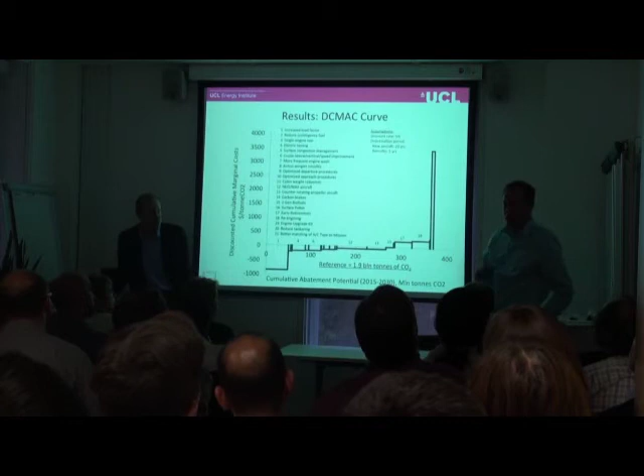Can I add something? Sure. So your concern may apply to the new aircraft, so new engine option aircraft, MAX Boeing, and the counter-rotating propeller aircraft, because we amortize them over the whole economic life of 20 years, which is beyond the 2030 time horizon. But for all other measures, the payback time is below 5 years, at least for those measures that are cost effective, so they're well amortized during that period.

Also, if we look at longer periods than the economic life, then these more fuel-efficient technologies, once introduced, contribute to lower CO2 emissions and actually get the opposite effect, that the costs are actually lower if you expand the time horizon. These are definitely things that we're going to be doing with the model.

Yeah, it's just interesting because it's generally previously been assumed that aviation was a kind of high-cost abatement sector. And obviously there wasn't a lot of evidence. Yeah, there's not been a lot of abatement cost curves generated, and as I say, they are difficult because there's a lot of assumptions.

Well, one question related to that is what is the real baseline? Because if airlines adopt these measures anyway because they're cost effective, perhaps that's the correct baseline to take, whatever you feel. Yeah, that's true. Should we even be accounting for increased load factor, because the airlines are starting to operate high load factors?

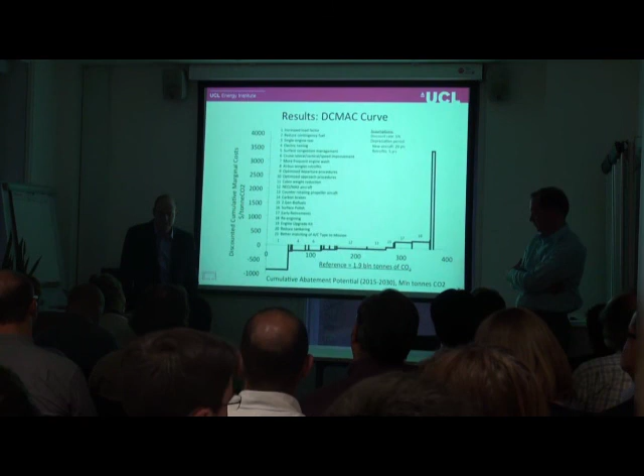Certainly regulation has been very instrumental with noise. There's a carbon standard being developed at ICAO at the moment, so that may fall into that category - how effective it is is a question. But beyond that, I'm not sure really. International agreements probably, since much of this is international. As long as there's no international, unified approach to this - this is why it's a market-based measure that ICAO is developing, but it's going to be critical how that plays out and the extent to which there's real international agreement on that. That's critical, but it's a market-based measure, similar to ETS.

Perhaps in the interest of time, in airline language, we are running into delays. But we had a passenger load factor here that Ryanair's O'Leary can only dream about - we were above 100%.